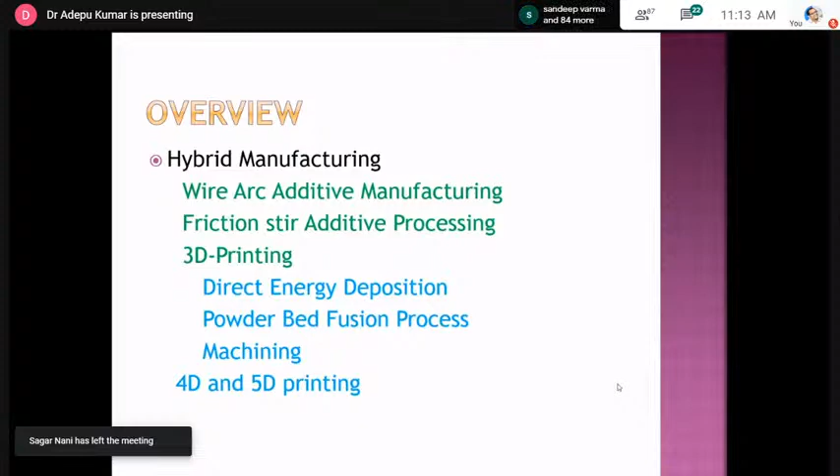I think most participants may be aware of friction stir welding, submerged arc welding, MIG welding and TIG welding etc. With the use of those techniques, we can add some extra additional features, and then develop a new product or new process that is useful for development of our products.

Basically, any manufacturing process comes under one of the areas - to develop any product, you can use any one technique or a combination of techniques to produce your components.

Suppose I want to develop a product of this nature, then I want to remove material from the stock, and finally I get the new product - that is known as the subtractive process. You remove material from the stock, then finally get the component useful for direct applications. Since you are removing material, it is a subtractive or negative process.

Coming to the next process, additive process - we are adding material layer by layer onto the substrate so that you can get the final component. You are adding something to the previous layer, that's why it is the additive process, or positive process.

The next process is the formative process. In this process also, you get the final component, but there is no addition or deletion of material from the stock. You only change the geometry from initial to final by pressing the material into a die so that you get the final shape.

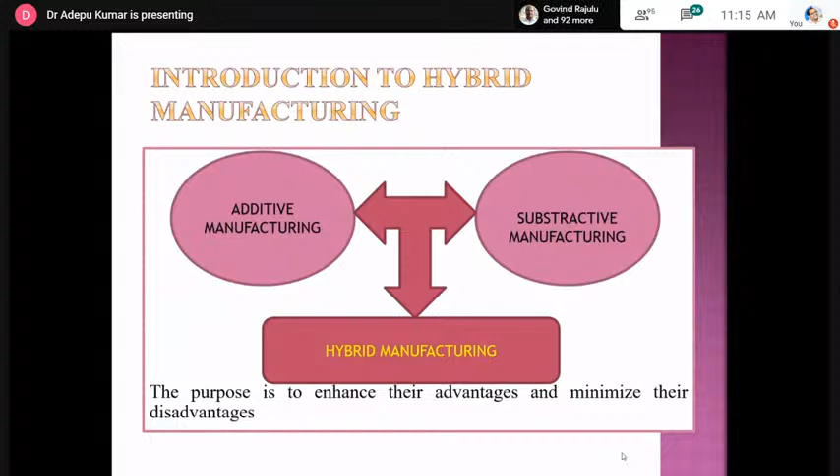For that, you need to develop a component through additive manufacturing with the same design. Then you need to remove the unwanted material from the geometry developed through additive manufacturing by machining process, and also do some finishing process. Then finally you get the final component.

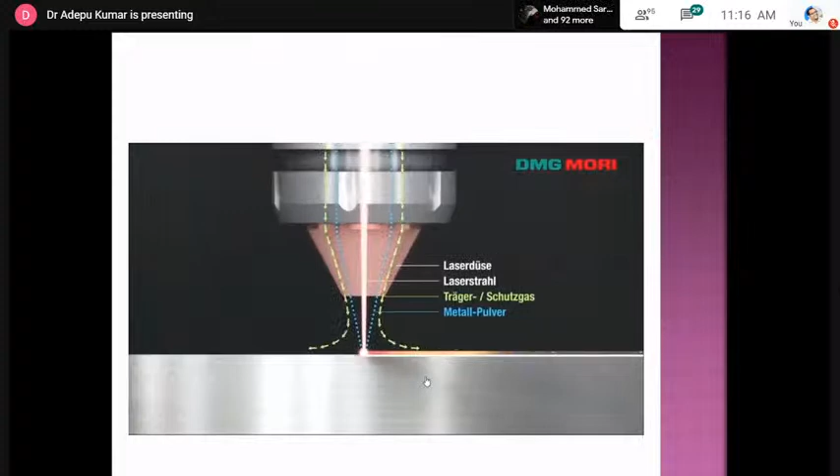So this is a small video - this is the direct energy deposition technique. In that you are developing the material by melting powder particles with a laser, and you can develop the component.

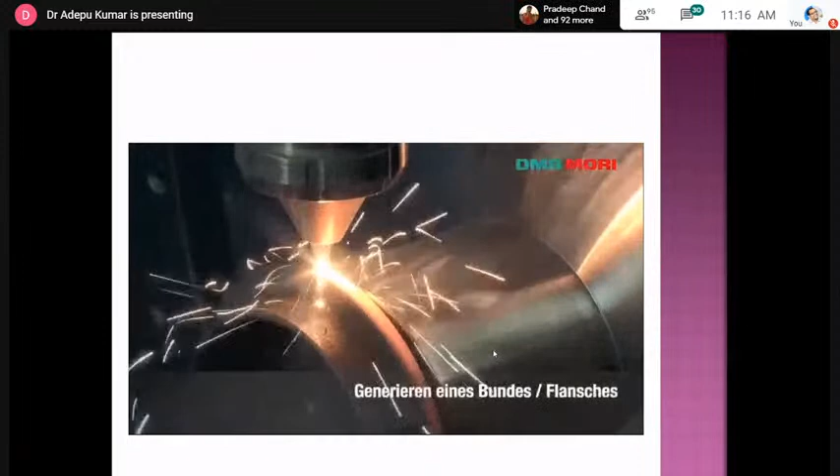Now this additive manufacturing is over, now you want to do machining. We can add a tool to the holder so that machining is performed on the component which is produced by the additive manufacturing process. Yeah, this is the final component.

So in that, my area is wire arc additive manufacturing process. There are some other techniques which can produce the same component through other technology like stereolithography, powder bed fusion process, direct energy deposition process - so many other 3D printing processes we are able to use to generate the product. But what is the advantage? You are going to see in future slides what is the advantage over other 3D printing manufacturing processes.

So the development of wire arc additive manufacturing is being driven by the need for increased manufacturing efficiency for engineering structures. It is able to produce a very near net shape preform without the need for complex tooling, molds or dies, offering potential for significant cost and lead time reduction, increased material efficiency, improved component performance, and reduction of inventory and logistics cost by local on-demand manufacturing.

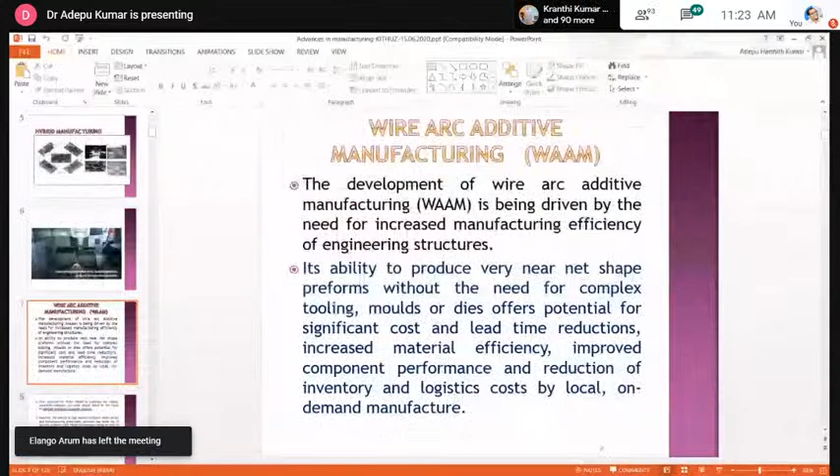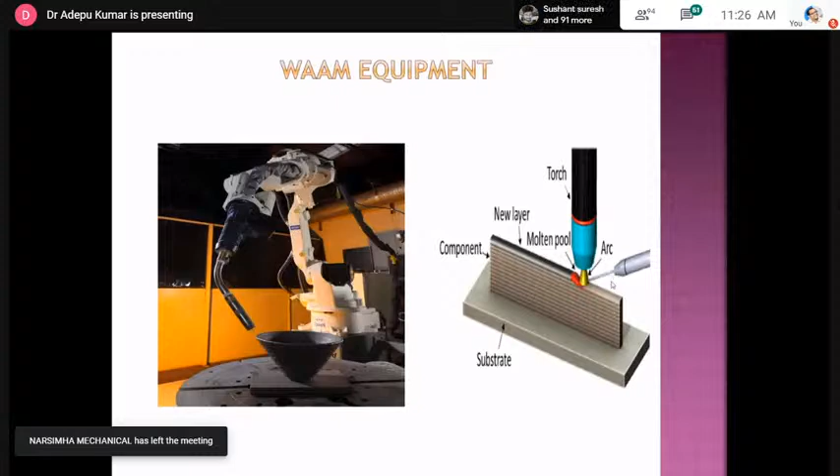So in between the layers, there is an interface. That interface is what we call a metallurgical bond between the two layers. If the metallurgical bond is perfect between the two layers, then whatever component you generate through wire arc additive manufacturing, or welding, or any other 3D printing process, your properties are good. Otherwise, your properties are not up to the mark.

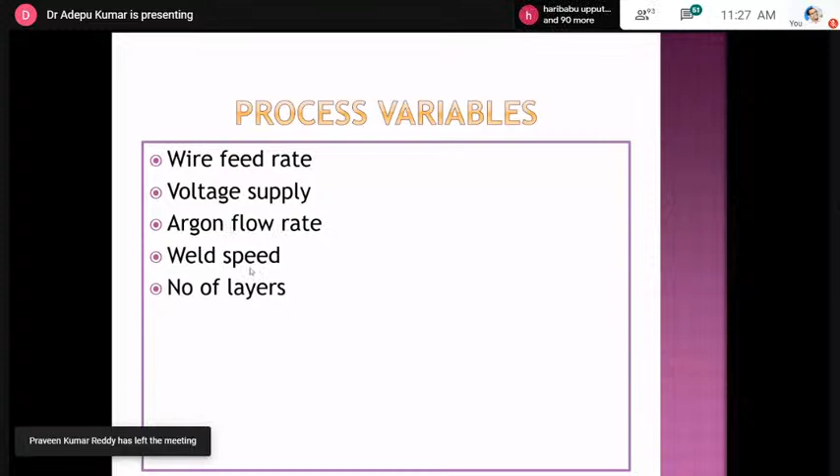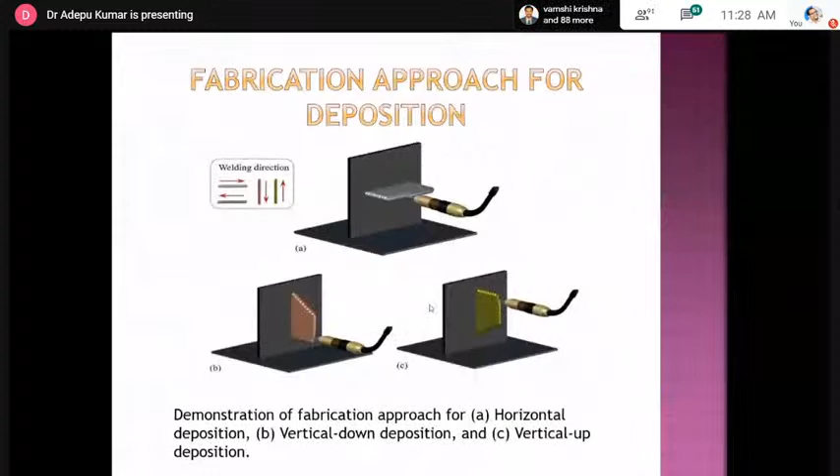So this is one video in wire arc additive manufacturing. This is one rib and another rib, that's where we started. So this is known as, yes, there are supporting structures. Now here the metal is deposited on the substrate with a certain velocity and certain speed, so that you can generate the 3D components very easily.

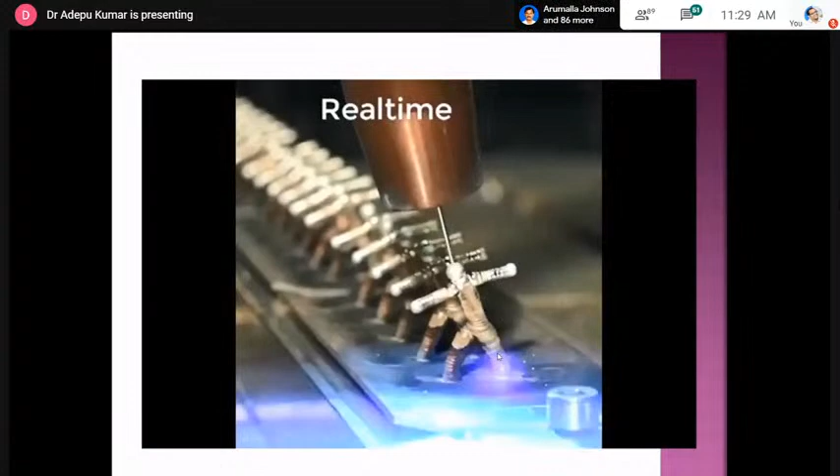So like that, you can develop the components through wire arc. So what are the benefits you are going to get? Production of large parts compared to powder bed fusion process, as the robotic arm volume is much higher than the normal 3D printing process. In that case, you can develop components in very large size and shape compared to 3D printing process.

Wire is less expensive compared to metal powders. WAAM hardware is less expensive compared to a 3D printer. It can deliver near net shape components, minimize the need for surface finishing, and is a good option for repair and maintenance operations for specific components like turbine blades, molds and dies.

So this is very important for repair applications. We cannot take out the entire component; you can do repair on-site for heavy structures. So the limitations of WAAM: heat management is somewhat difficult for materials like titanium using inert gas as atmosphere.

It limits the size of the parts that can be produced with this technology, and installing such a chamber will increase the cost of the equipment. Although a number of companies are developing WAAM technology for production, none is commercially available yet.

But as of today, we can combine KUKA and CMT process so that we can generate the system, and produce the component in the additive manufacturing area.

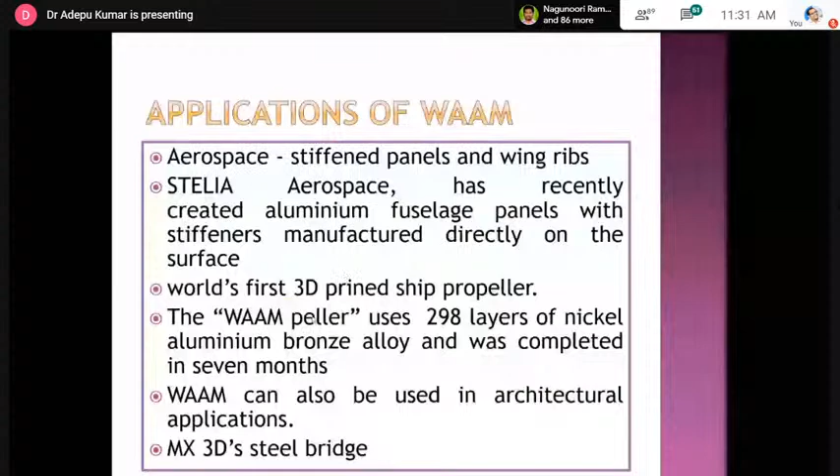Now another process is friction stir additive manufacturing. In the earlier process, we are melting the filler wire and depositing the melted filler wire onto the substrate, allowing it to solidify.

Some materials are not suitable for wire arc additive manufacturing, especially titanium and aluminum alloys - it is very difficult, requiring a lot of precautions. But in a solid state process, you generate components without much difficulty because you are not melting the material. You just heat it to its recrystallization temperature, which softens the material so you can develop the components.

It is basically originated from the friction stir welding process. In friction stir welding, a non-consumable tool has a shoulder and pin diameter, rotated at a certain RPM, with certain shoulder and pin features. The pin is inserted between the materials or layers to be processed, and the shoulder stays in contact with the topmost layer while rotating. This generates heat, which softens the material, and material movement takes place from the advancing side to the retreating side, completing the process.

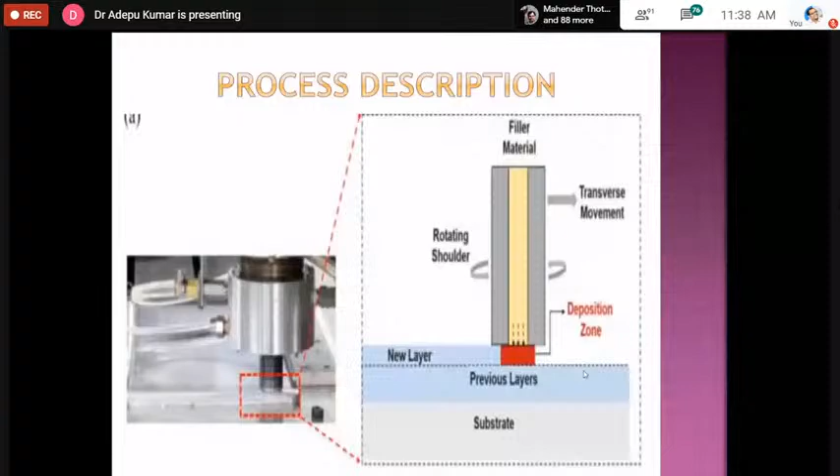So regarding friction stir welding and processing, let me explain with these two pictures. This is friction stir welding, and this is additive friction deposition. In friction stir welding, you have a shoulder and a pin.

This tool is rotated at a certain RPM. Because of the rotation, heat is generated between the rotating shoulder and the non-rotating base plate. That heat is utilized to soften the material. At that time, you give movement to the shoulder in terms of welding speed. Then the material is dragged from the advancing to the retreating side and fills the back side of the pin. That is the principle of friction stir welding.

So instead of a pin, I use a hollow shoulder. In the hollow shoulder, I fix the filler material which is going to deposit onto the substrate. Because of the heat generation by the shoulder and the substrate, that heat is utilized to soften this filler material and deposit it onto the substrate. So that's a simple change in the tool. Then according to deposition rate, you also give movement to the shoulder. That mechanism is required in friction stir additive manufacturing process.

This is a video I downloaded yesterday on friction stir additive manufacturing. You can also improve the efficiency 30 times the normal production times.

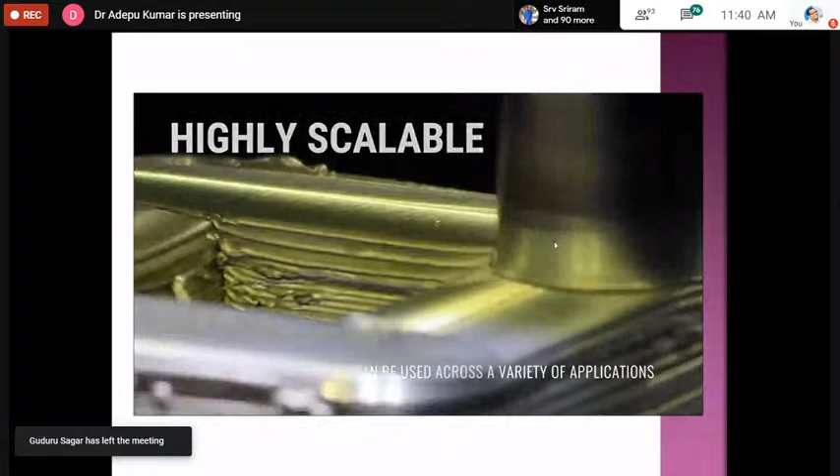So this is the hollow shoulder. In between there is material which is going to be deposited, that is the filler material. Then according to the deposition rate, you can feed that tool.

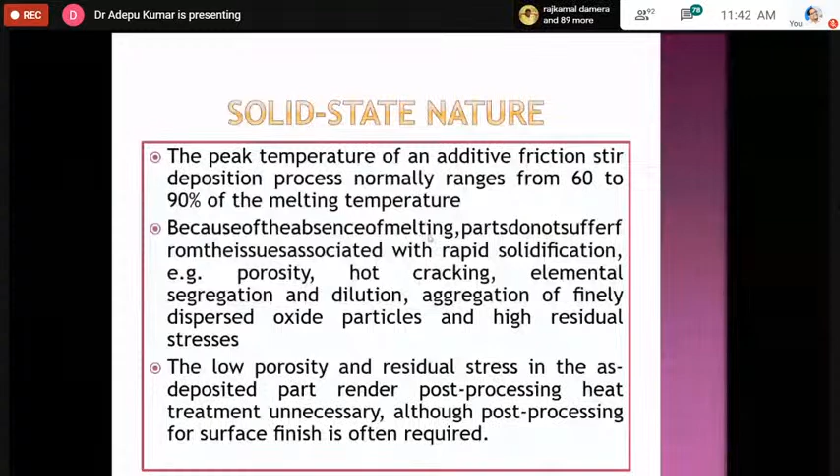Additive friction deposition can use a solid rod made from a cast or wrought alloy as the feed material. Traditional atomized powder feedstock can also be used without stringent requirements on powder attributes for high quality reproducibility. Aluminum 6061 and Inconel 625 parts have been manufactured using solid rod feed material, and aluminum molybdenum and aluminum silicon carbide composites have been manufactured from powder. There is no issue because it is a solid state welding process - you can weld or deposit any material.

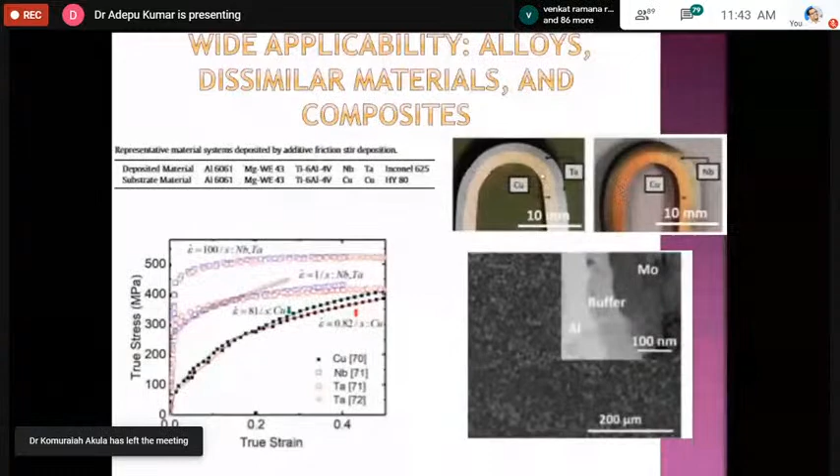What are the advantages and benefits of friction stir processing? It is non-beam and uses flexible feed material, is scalable, involves no melting, low energy, low cost, and flexible feed materials including cast alloys and consolidated powder. It has high build rate and large scale ability, repeatability, dynamic recrystallization, no stratification, refined grain size, equiaxed grain size, isotropic properties, and low porosity. Compared to 3D printing, you get a lot of advantages with friction stir processing.

The limitations: the development of additive friction stir deposition technology has focused on increasing part size and build rate. As a result, the shoulder and filler dimensions are large, leading to large in-plane features.

Next, in additive friction deposition, the deposition path is guided by a G-code based hatch pattern. Since algorithms are available to automatically convert the CAD file to G-code, it's straightforward to go from a CAD file. Nowadays CAD files are available in open literature - you can download the CAD file, and that file is converted into G-code. Then you can interface the friction stir welding machine according to the CAD file, and the tool moves accordingly.

Buckling is an issue in friction stir additive because you need to add a large amount of force during the processing, so buckling is a main issue for this process. Tooling is also an issue because there is a lot of wear and tear due to the friction generated, so you need to develop various tool materials for improving wear and tear.

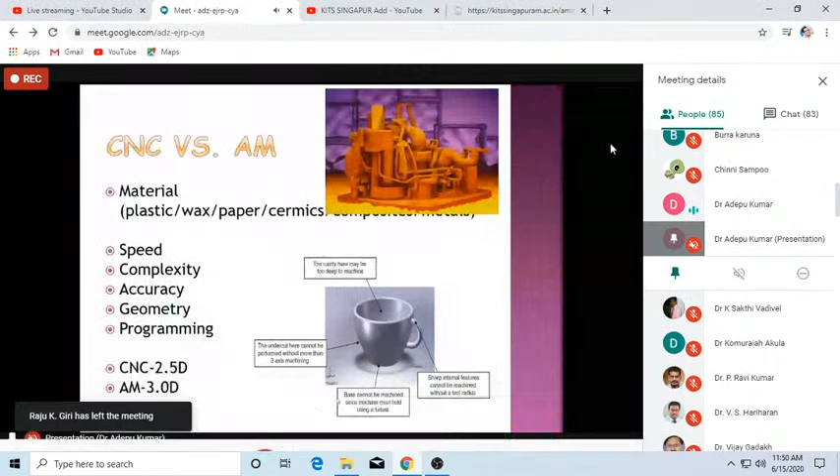Topology optimization can be used to get the final geometry. If your geometry is correct, you can convert that geometry into an STL file, but again you have to lose some features of the object. So if you don't want to lose the features, you need to apply topology optimization techniques, so that you can generate the components without losing those features.

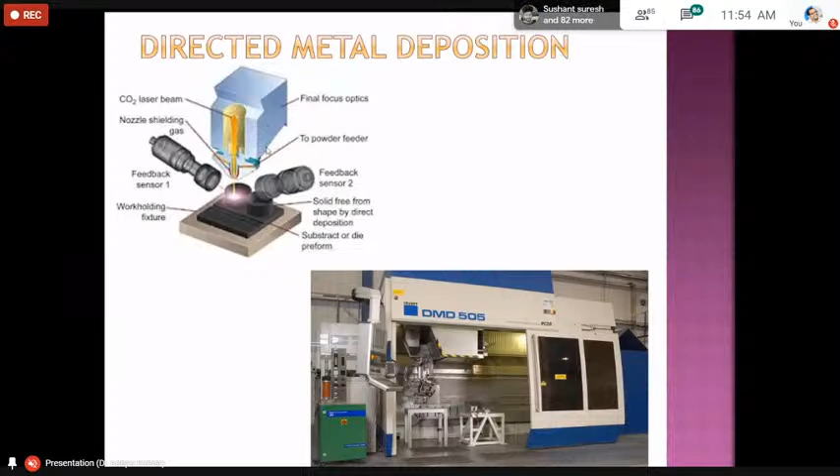We are coming to direct energy deposition, where the laser is a power source interacting with the powder particles. The powder particle is melted and fused onto the substrate. If the laser is not sufficient, there is a feedback sensor that senses the laser power. If it is not melted, it gives a signal to the laser source, which then increases power so that you can build the components.

So direct energy deposition technology, DED, DMD, direct metal deposition technology, is generally used for repair of structures. The benefits include speed, as in faster product to market.

A study performed at the National Center of Manufacturing Science indicates the die production time can be reduced by 40% using DMD technology. Economically, there are lower tooling costs due to factors including reduction.

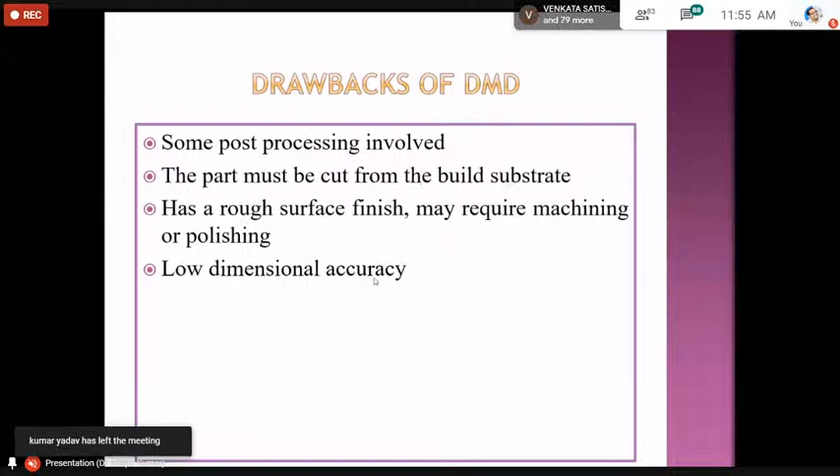Then drawbacks: post-processing is involved, the part must be cut from the build substrate, it has a rough surface finish and low dimensional accuracy. Applications include die repair and refurbishment, direct metal prototyping, surface modification, and aerospace and aircraft components.

Then another process, powder bed fusion. Here the powder is spread onto the substrate, then you apply the laser power source according to the STL file format. The laser source moves according to the STL format, the laser power interacts with the powder, the powder is melted and deposited on the substrate, so that you can finally generate the components.

Through the additive manufacturing process, DED and PBF, that is powder bed fusion process, a lot of material is wasted in this process compared to DED technology.

Now this is another important mechanism involved in either powder bed fusion or DED process. So here is the substrate, and the laser power source is impacting on the substrate. Then some of the laser is reflected back, some is scattered, and some is absorbed by the material, and some is transmitted.

Whatever laser is impacting onto the substrate, if it has high absorptivity, more and more of the energy supplied to the substrate material will be totally absorbed by the material, and melting takes place.

Then some materials have low absorbability, like aluminum alloys. Those are highly reflective in nature, so whatever laser is impinging onto the surface will be reflected back. The absorption of laser by the material is very less, so the heat content is not sufficient, and due to that, melting of the material could not take place.

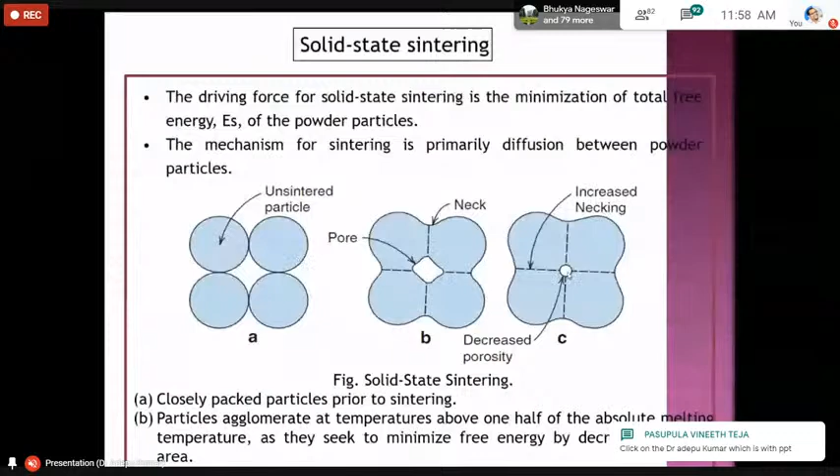Another mechanism is chemically induced binding. Because of the presence of SiC and the presence of oxygen, it forms SiO2, which binds together a composite of SiC and SiO2, acting as a binder. Similarly, due to chemical reaction with oxygen to form oxides like zirconium oxide, or aluminum in the presence of nitrogen forming aluminum nitride, the particles bind together.

Then another mechanism involves binding material which is coated or added to the powder particles. Because laser energy is available, that energy is utilized to melt the binder particles, which will be occupied between the grains so that the bond is formed.

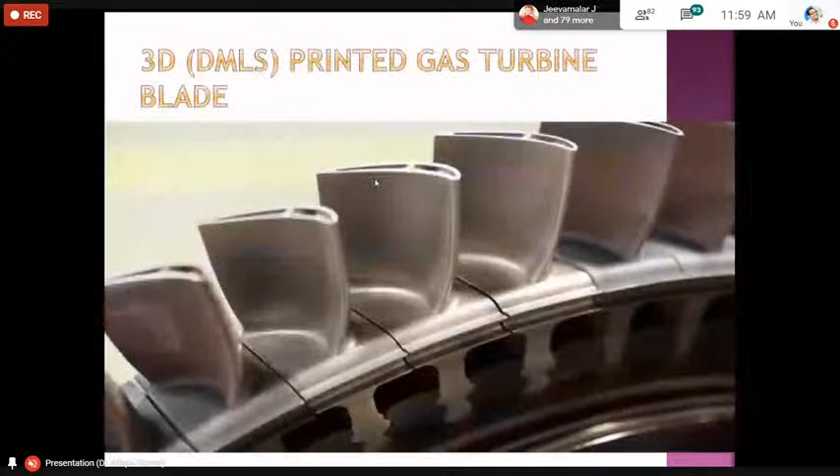Then full melting is the normal mechanism: melting of all the powder particles and allowing them to solidify to form the part. So this is one of the mechanisms in powder bed fusion, with drawbacks and applications in medical, aerospace, manufacturing, automotive, and electron beam as another source.

This is similar to the powder bed fusion process using a laser power source, but here instead of laser, electron beam is the source. Because of the electron nature of the electron beam, it should be performed under vacuum environment only. Without vacuum, you cannot perform 3D printing using electron beam as a source, because electrons are very, very small and very low density compared to oxygen and nitrogen molecules. That's why you don't get accurate penetration and cannot generate heat at a particular place. That's why we need to create a vacuum.

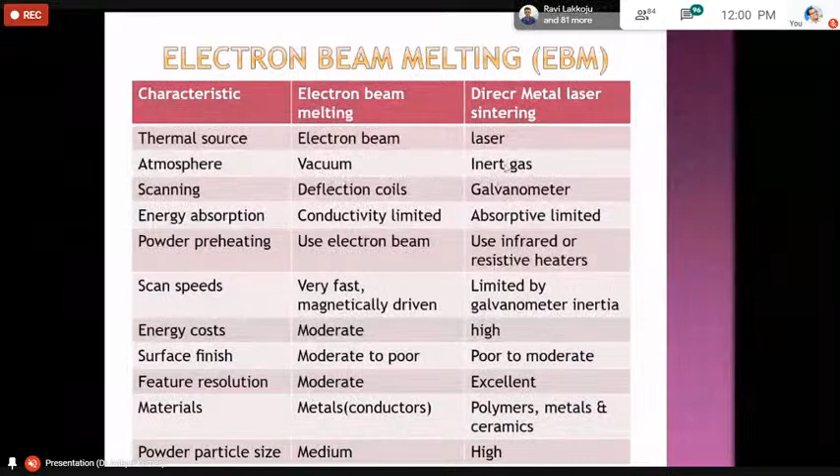But due to the creation of vacuum, the cost of the process is very high compared to laser as a power source, and the size is also very limited. So the difference between electron beam and laser beam is that electron beam must be performed under vacuum, whereas laser can be performed in inert gas, and mostly works with conductive, highly absorptive materials.

What are the benefits? Productivity is increasing, and there are no residual internal stresses. The drawback is that it only works with conductive materials.

Then what is 4D printing? 4D printing is the process through which a 3D printed object transforms itself into another structure under the influence of external energy input, such as temperature, light, or other environments.

This is similar to the 3D printing process. After printing, just because of the influence of an external agency, the object's dimensions are going to change in the 4th dimension - that is known as 4D printing. There is no confusion at all; we are printing the material with a smart material.

Or functionally graded material - according to the function, it is going to change the material property dimensions. So however, 4D printing adds the dimension of transformation over time. It is therefore a type of programmable matter.

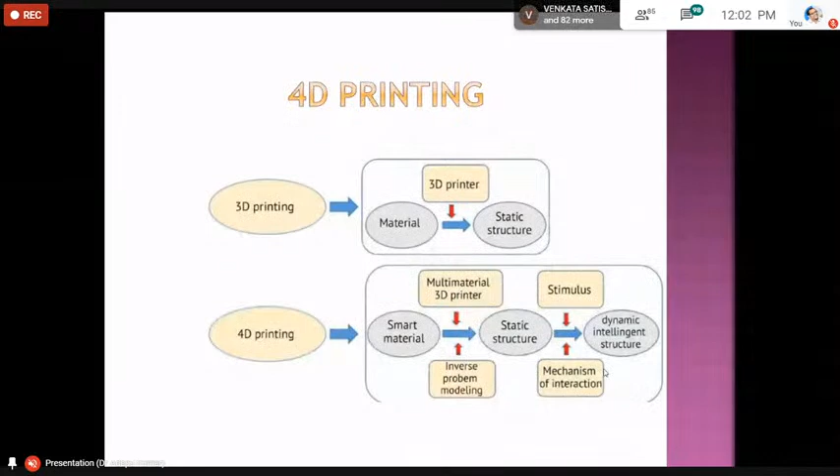Just a comparison between 3D printing and 4D printing: in 3D printing of material, you get a static structure. Here in 4D printing, you get dynamic structures because of the influence of the external agency - those dimensions are going to change, that is what you can call 4D printing. The size changing, I'm just showing one video.

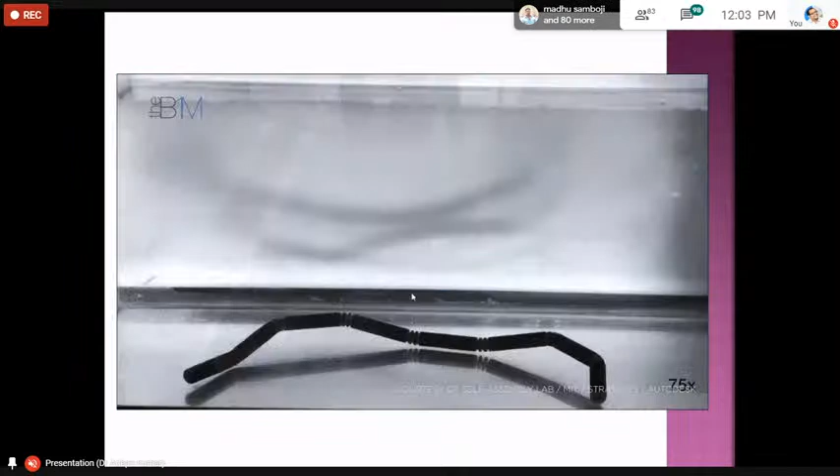So initially we printed 3D printed material, then because of the external agency, this is going to change.

Now coming to 5D printing, the name of this technology is quite misleading, since 5D printing does not refer to the addition of a fifth dimension of printing. It is not going to add any fifth dimension. 5D printing refers to 3D printing using a 5-axis 3D printer instead of the 3-axis used in conventional 3D printing. 5-axis additive manufacturing essentially builds the object from multiple directions, thus producing stronger parts than regular 3D printing.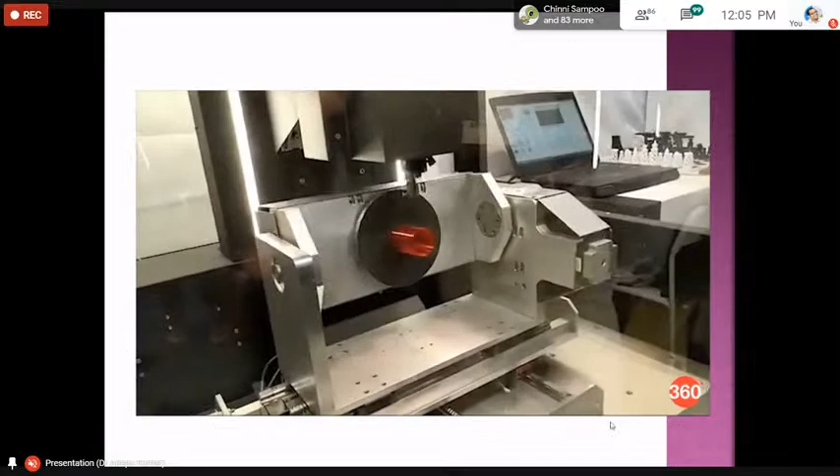So some of the research directions you can also see from this.

New product development and innovation of components through additive manufacturing, through wire arc additive manufacturing or hybrid machining process, and biomedical applications. New materials developed through friction stir additive manufacturing or 3D printing, and rapid tooling and rapid manufacturing. Also, geometric modeling, data exchange and software issues, process improvements and development of new process equipment and controls, development of newer applications in aerospace, electronic process modeling and simulation issues.

Then there's the scaling issue, from micro to nano level. With this, I can conclude my lecture. This is now open for discussion.

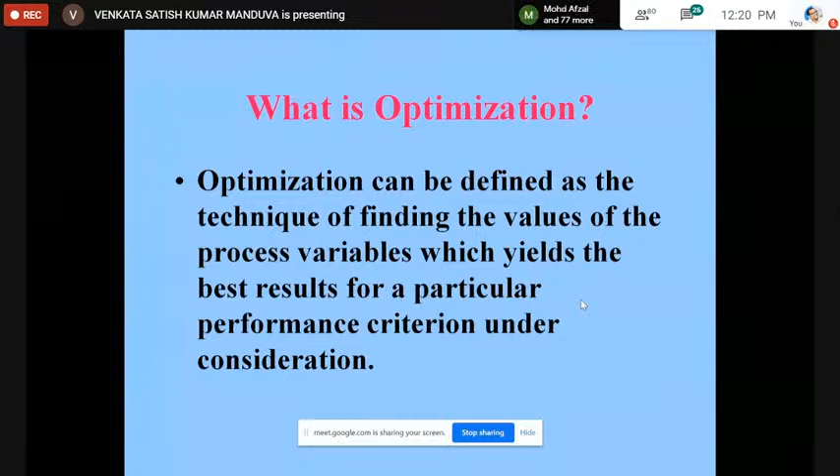Coming to today's topic, because the algorithms we are talking about are meant for optimization, let us see what is optimization. As all of you know, optimization can be defined as the technique of finding the values of the process variables which yield the best results for a particular performance criterion under consideration. So the performance criterion we are deciding, and also the values of the process variables. Of course, this is everywhere in our day-to-day life, not only in industries, not only in research. Knowingly or unknowingly, we are solving these optimization problems.

For example, we go to the college or institute from home, or come back home - automatically we try for the shortest path. Similarly, if you want to do some personal work, we prioritize and optimize the time so that all the works prioritized according to priority are completed in time. Similarly, budgeting at home or at any institution or organization. These are simple examples which I want to share for optimization in our day-to-day life.

Similarly, this is a mathematical problem everybody knows - the traveling salesman problem. A person starts from a city and has n number of cities to cover, and has to come back to the original city - what is the shortest path, and in how much time can he cover it. That is the problem, a well-known mathematical problem. If you take 20 cities, a person has to cover all 20 and come back to the original city - there are 20 factorial possible ways. You have to search all those ways for the best one. Such problems are really tough to solve by normal optimization techniques, so we may use advanced methods, tools, or algorithms for solving such problems.

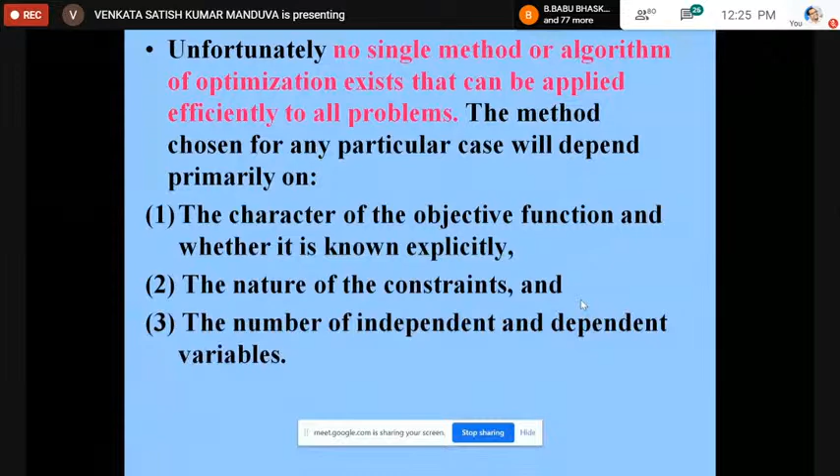So constraints are a set of conditions that allow unknowns to take on certain values but exclude others. For example, in a scheduling problem, precedence constraint is one example. What is precedence constraint? That means unless the preceding operation is completed, we cannot go for the succeeding operation. That is, unless drilling operation is completed, we cannot go for boring or reaming.

So when we are scheduling, we have to keep precedence constraints in mind. Similarly, for other problems, different types of constraints will be there. And almost all problems will have an objective function, either maximization or minimization. But there are rare possibilities with no objective function.

In reality, in some cases, for example design of integrated circuit layouts, the goal is to find a set of variables that satisfy the constraints of the model. Here the user does not particularly want to optimize anything. Whether constraints are satisfied or not is our intention, but we are not interested in maximizing or minimizing anything.

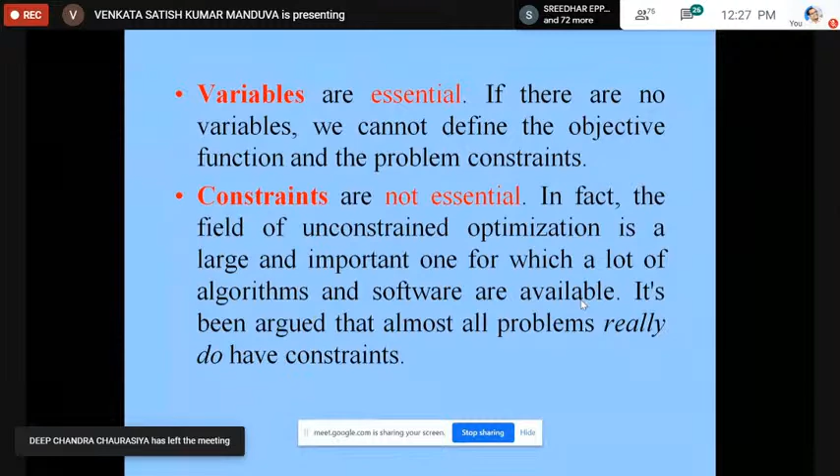And models: modeling is the process of identifying the objective function, variables, and constraints. The goal of a model is to get insight into the problem. So if we want to get insight into the problem, we need to model it. A good mathematical model of the problem is needed for effective optimization.

And algorithms: even though models are available, most models for real world problems are too complicated to solve with paper and pen. So an effective and reliable numerical algorithm is needed to solve such problems. Modeling is there, but it has its own limitations, and that is how the necessity of algorithms comes into the picture.

So there is no universal optimization algorithm, as I told you earlier. Even though a variety of optimization algorithms are available in literature, we cannot say there is one algorithm which can solve any type of optimization problem. But whatever optimization algorithm it may be, we will expect certain characteristics from it.

What are those characteristics? What we expect is robustness, that is good performance for a wide class of problems. It may not be better, it may not be the best for any particular problem, but at least for a wide class of problems it should give good performance.

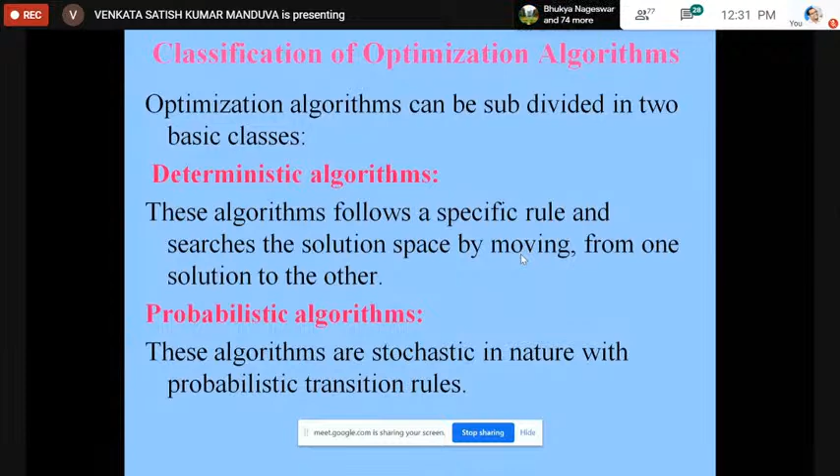What are the examples for different algorithms? In deterministic algorithms, we have covered a few, and there may be more under this category which are missing here. Just to give you an idea of the difference between deterministic and probabilistic, I have shown this slide. State space search, branch and bound, algebraic geometry - these come under deterministic algorithms.

Whereas under probabilistic, a lot of algorithms are available in this category, like hill climbing, random optimization, simulated annealing, tabu search, and so on. Similarly, you can see the classification here.

We are concentrating today on soft computing - the area under which evolutionary algorithms and swarm intelligence come. So today we are not concentrating on other algorithms, even though there are a variety like Monte Carlo algorithm or others. Under soft computing, evolutionary computation is there, so evolutionary algorithms indirectly come under evolutionary computation.

There are a variety of evolutionary computation algorithms like genetic algorithms, learning classifier systems, evolutionary programming, evolution strategies, and of course genetic programming. Sometimes in the literature, a few people say differential evolution is a separate one which comes under evolutionary algorithms.

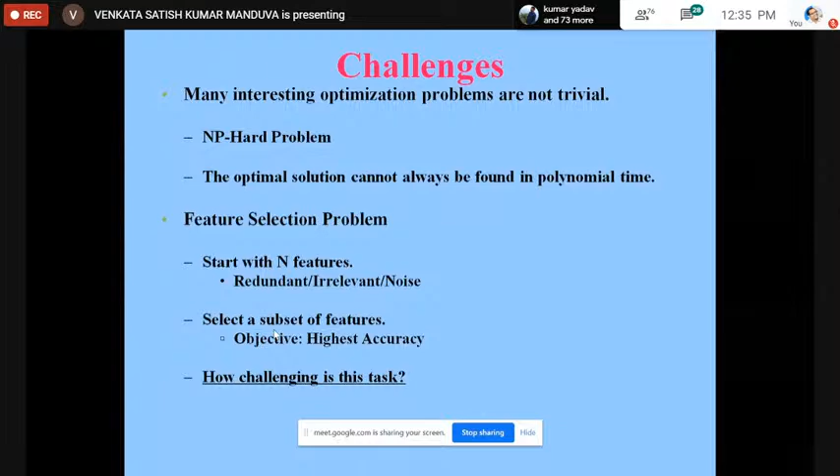So this is one point where we think about other alternative algorithms. Similarly, there are challenges - most optimization problems are not trivial and are NP hard. Feature selection is another problem in most optimization problems. If you have a 32 feature problem, there are so many possible combinations, so searching for one particular best solution is a tough task.

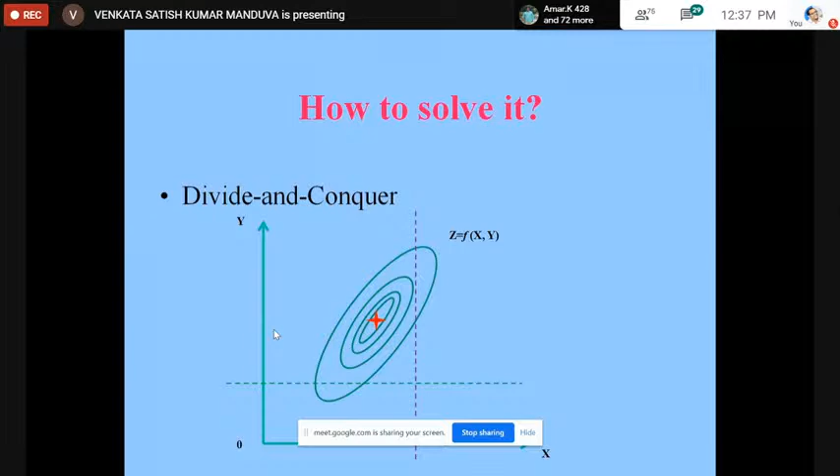So there are some certain issues with traditional algorithms. How to solve this? The way the literature has given us is that we can divide and conquer. That means the solution search space can be divided and conquered, meaning you divide the search space and then search the space in parallel. That is the best method people have found.

So the solution for this is parallel search, conducting searching in different areas simultaneously. Rather than moving one by one, you will go simultaneously at different places and search. That is parallel searching, and it is also population based, meaning at a time we will take a group of solutions. In parallel search, we will try to avoid unfortunate starting positions and also employ heuristic methods to effectively explore the space.

Exploitation is one important factor, exploration is another important factor. Exploration is covering the total search space for optimal solutions, whereas exploring at one space, you don't want to leave any stone unturned. That is exploitation. So with this concept, the evolutionary algorithms came into picture.

So now let us see what evolutionary algorithms are. It is nothing but learning from nature, as I told you. You can see how we are now flying by planes, because humankind got motivated by looking at the birds, and that is how today we are flying by aeroplanes or even rockets. The idea of flying came from nature only. Human beings imitated nature. This is one simple example.

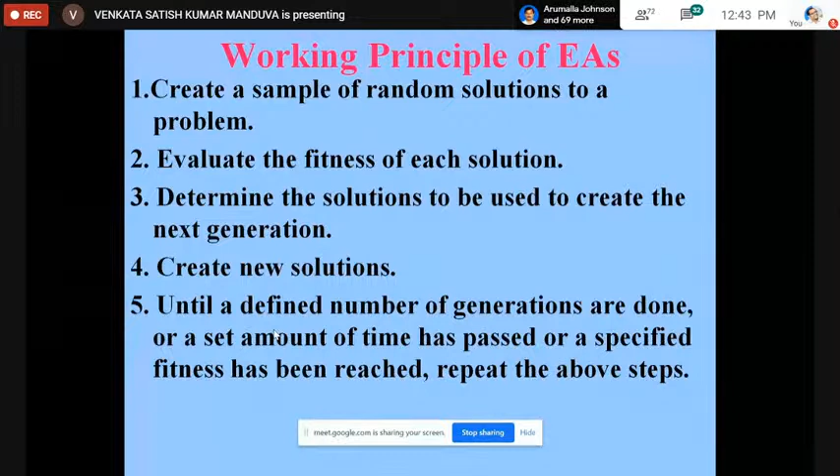So what do we need to solve an optimization problem through EA? We need a proper representation of the potential solution, which is very important. Similarly, a correct way to create an initial population of potential solutions must be done correctly. Also, an evaluation function should be there, to calculate the fitness of the individual, as I told you just now. These are important, and the selection procedure must be chosen properly.

Unless you choose the parents properly, you cannot expect better children. If better parents are chosen, you can expect better or even the best children normally. Sometimes, irrespective of the parents, there is still a possibility of good outcomes, but since we have the choice in our hand, we will try to choose the best parents.

Similarly, evolutionary operators like crossover and mutation alter the composition of the children. And parameters like population size, number of generations, probability of crossover and mutation are to be selected appropriately.

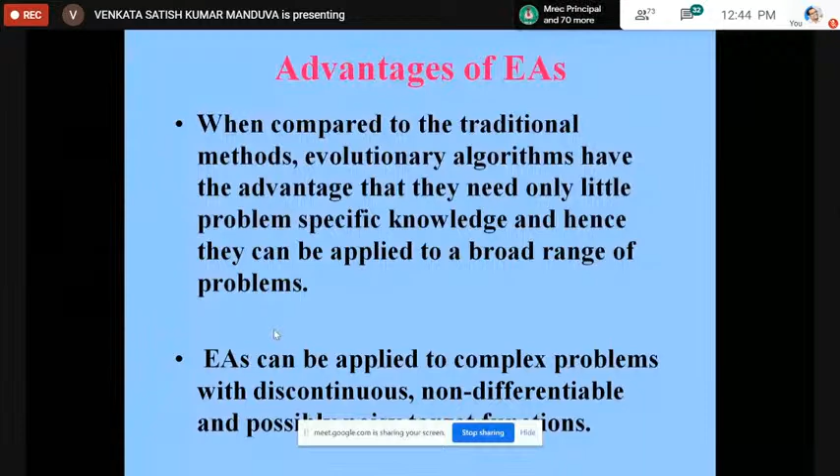Now, advantages of EA. Compared to traditional methods, evolutionary algorithms have the advantage that they need only little problem-specific knowledge, and hence can be applied to a broad range of problems. EAs can be applied to complex problems with discontinuous, non-differentiable, and other such characteristics. Their response to external process parameters is robust compared to previous methods, and hence does not need fine-tuning of these operators even when applying them to different problems.

Evolutionary algorithms use probabilistic transition rules, as I told earlier, not deterministic, because they come under probabilistic algorithms. They are generally more straightforward to apply because no restrictions exist for the definition of the objective function. And as a variety of evolutionary algorithms are available, a problem-specific EA can be chosen by the end user.

Evolutionary algorithms can provide a number of potential solutions to a given problem, and the final choice is left to the user. It can give a number of better solutions, and you can choose one among them. This is especially possible in multi-objective problems, where you will get Pareto optimal solutions, and you can choose one among them.

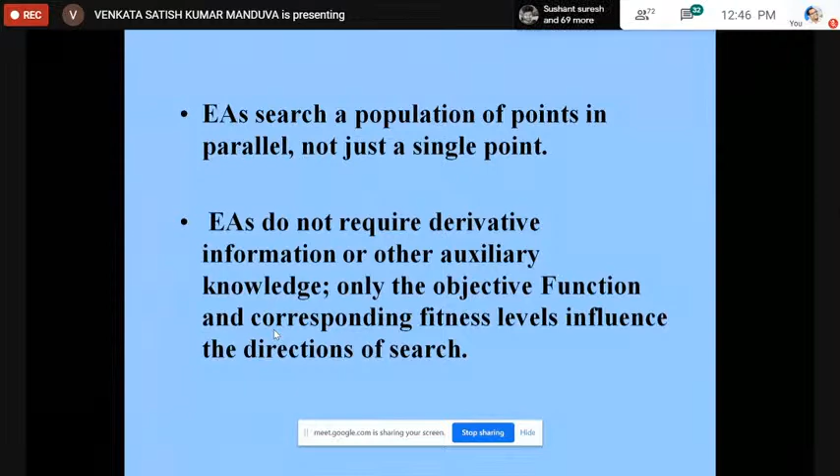So evolutionary algorithms search a population of points in parallel, not just a single point at a time. And they do not require derivative information or other auxiliary knowledge; only the objective function and corresponding fitness levels influence the direction of search.

Coming to genetic algorithms, they are good at mapping the natural process of evolution onto a computer system. As I mentioned, it purely imitates nature, where parents are used to produce children. Binary coding is normally used.

I will come across GA in detail, but I want to give a few points about evolution strategies also, which also come under evolutionary algorithms. Evolutionary strategies differ from GA mainly in the selection process. In GA, the next generation is created from the parental population, choosing individuals depending on their fitness.

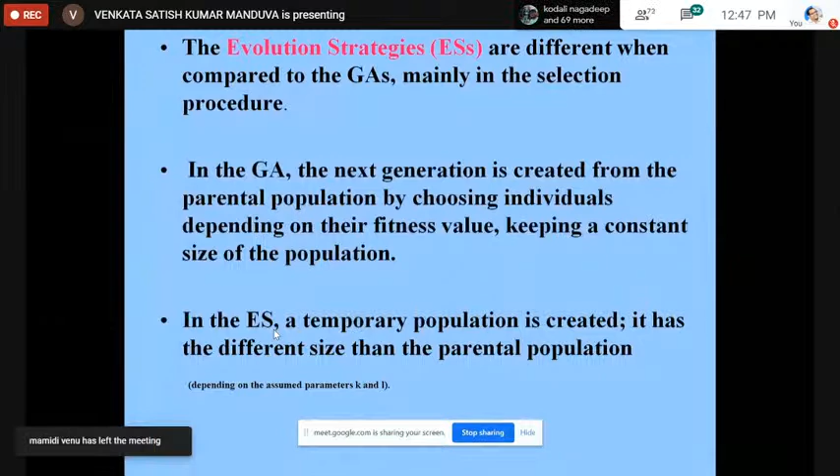Whereas in ES, a temporary population is created, which has a different size than the parental population. This is where the two differ. In this step, fitness values are not important. Individuals in the temporary population undergo crossover and mutation, whereas in genetic algorithms, it is not the case.

From such populations, an assumed number of best individuals are selected for the next generation. That is how ES proceeds. ES operates on vectors of floating point numbers, whereas classical GA operates on binary vectors.

Coming to genetic programming, another member of evolutionary algorithms which is relatively new, it is a specialized form of GA which operates on a very specific type of solution using modified genetic operators. It was developed by Koza as an attempt to find a way for automatic generation of program code when the evaluation criteria for proper operation is known.

Of course, genetic operators are specialized, working on trees. This is the basic difference. In genetic programming we use trees, with crossover as exchanging subtrees and mutation as change of a node or leaf. Because the search solution is a program, the evolved potential solutions are coded in the form of trees instead of linear chromosomes. So GP differs from GA in the coding schema used, but the loop is the same, only here we use trees.

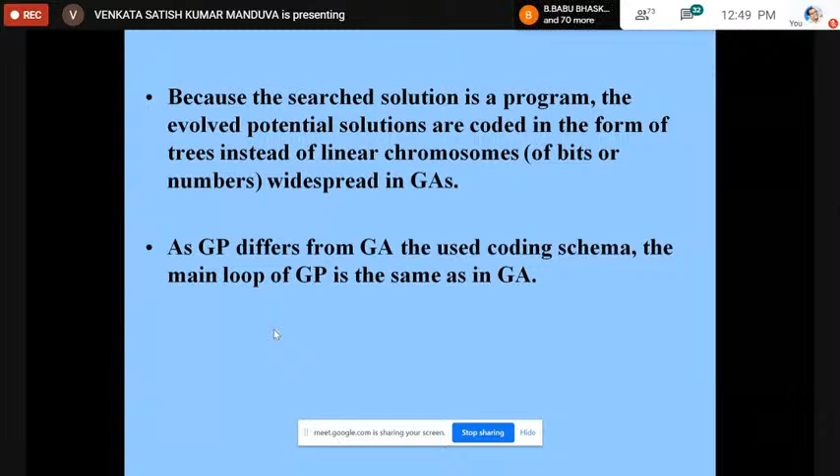Coming to evolutionary programming, it was developed as a tool for discovering the grammar of an unknown language. However, it became more popular when proposed as a numerical optimization technique. EP is also similar to ES, evolutionary strategies, but with one essential difference: in evolutionary programming, the new population of individuals is created by mutating every individual from the parental solution. As discussed, in ES it was not like that.

A temporary population was created, and in ES, every individual has the same probability of being selected to the temporary population, but that is not so in evolutionary programming. Here, mutation is based on random perturbation of the values of particular genes, and the newly created and parental populations are the same size. Finally, a new generation of the population is created using ranking selection. Of course, different types of selection operators exist; this is just one type.

Coming to differential evolution, the last member of the evolutionary algorithms we will discuss in detail. It is a type of evolutionary algorithm useful mainly for function optimization in continuous search spaces. The principal version of DE was developed by Storn and Price, but later different versions were developed by others.

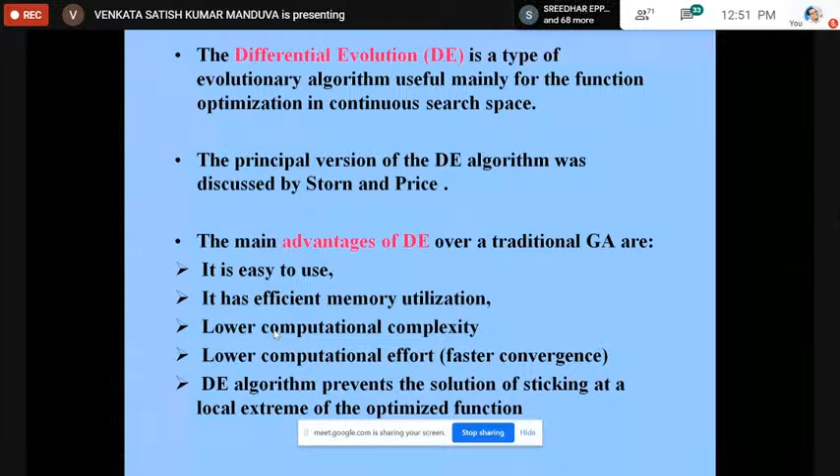Let us shed some more light on genetic algorithms. As I told you in the beginning, my focus is to give information to the youngsters so that they can pursue further and use these wonderful tools for their respective areas.

Coming to genetic algorithms, they are random evolutionary search algorithms which mimic the principles of natural genetics. It was developed long back in 1975 by John Holland, and it is a set of procedures which, when repeated, enable solutions to a specific problem.

Before looking at the steps, let us see some terms involved in genetic algorithms. Objective, irrespective of the algorithm, is the function to be considered for minimization or maximization. It need not be only for GA; for any algorithm, it will be there.

Coming to gene, this is a single feature within a chromosome, or a working subunit of DNA, because we will talk about genes in terms of genetics—that is how genetic algorithms are named. Similarly, gene trait: color of eyes is a trait, color of hair is a trait, and so on.

Allele is another possibility—color of eyes need not be only gray, it can be blue or black. Similarly, genotype is the actual genes carried by an individual, whereas phenotype is the physical characteristics into which genes are translated. This is just some awareness about the terminology I'm trying to give.

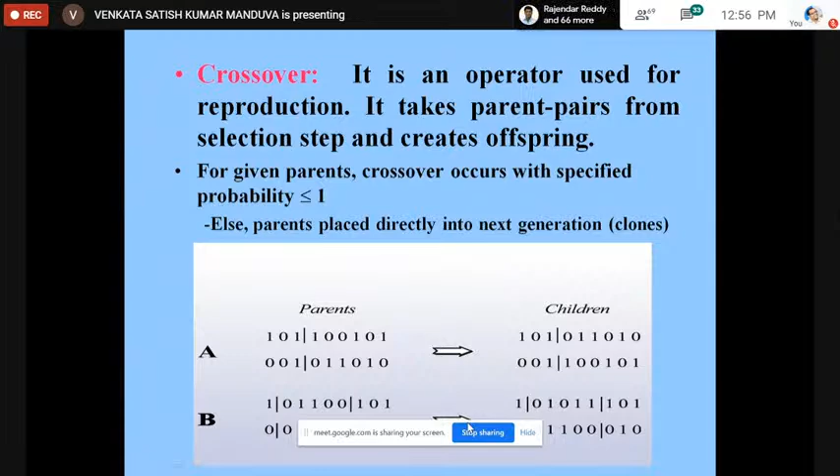Then mutation—mutation is another operator. It is an operator which exchanges one gene with another gene within the chromosome, and it slightly varies; you can see one is replaced with 0.

I want to outline the steps involved: initialization, random selection, evaluation of fitness. Once the initial population is generated, its fitness is evaluated, then parents are selected, then reproduction—that is, crossover and mutation—is done. These are the normal steps involved.

I also want to show the same process in flowchart form—this is how it takes place.

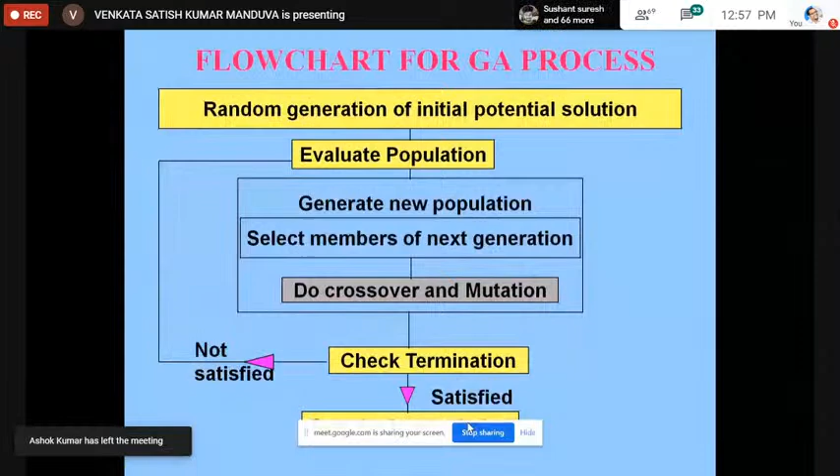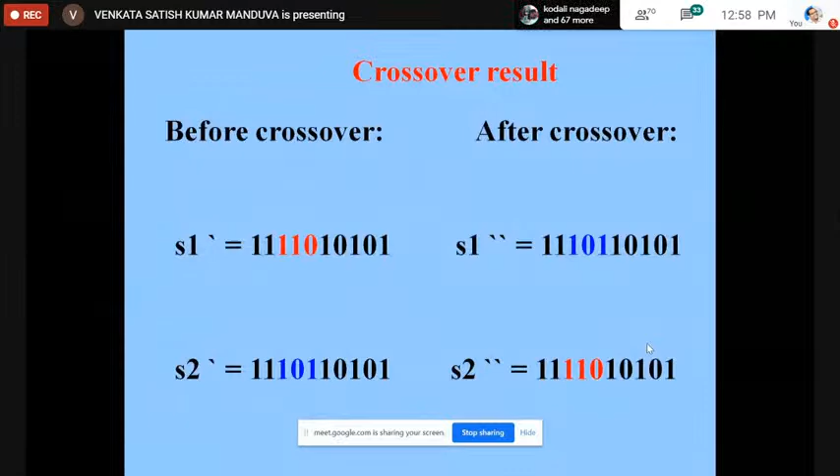So now we have done crossover. You can see this crossover on the same generation's population—we selected two parents, S1 and S2, and performed crossover. We also performed mutation. If you observe, the fitness has changed slightly.

Of course, it is only one generation. Like that, we can go on generation to generation. We can increase the fitness, and also we can get a better solution.

Coming to differential evolution, the second member in evolutionary algorithms. It is also a population-based algorithm, and it is an improved version of genetic algorithms, I can say. Here vectors are used, NP vectors, each of dimension d, where d is the number of variables in the optimization problem. It is also randomly searching the space. So here, I want to introduce the main concept of DE.

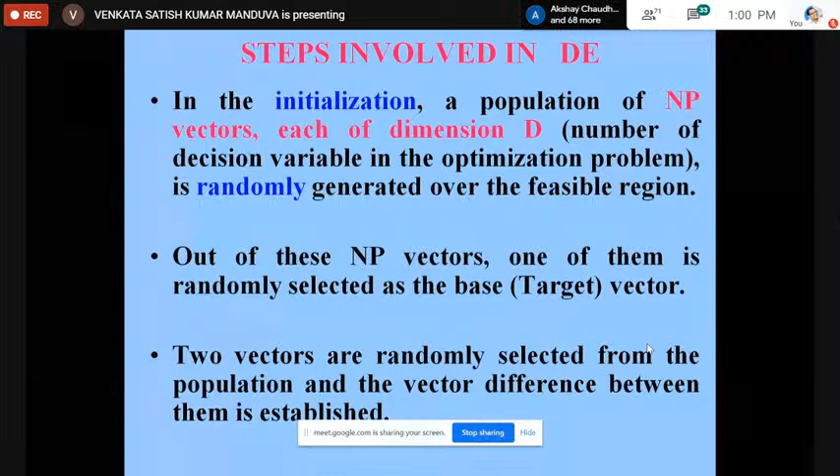Basically, two vectors are randomly chosen from the population. Suppose different vectors are available, each vector is nothing but a solution. Two vectors are randomly selected from the population, and their vector difference will be calculated. This is shown as XR2G minus XR3G - that is the difference. This difference is multiplied by a weighing factor F. Once F is fixed at the beginning of the algorithm, it will normally be maintained throughout the algorithm.

Once the mutant vector is known, then a target vector is also selected from the population, and the target vector and mutant vector are now subjected to crossover. For all dimensions in the vector, we will do this crossover operation, and then based on that, we will generate a random number. We have the crossover probability already fixed. Based on whether this random number is less than or equal to CR or not, we will choose either the mutant vector or the target vector. If satisfied, we choose the mutant vector; otherwise, the target vector. So crossover operation is performed in differential evolution.

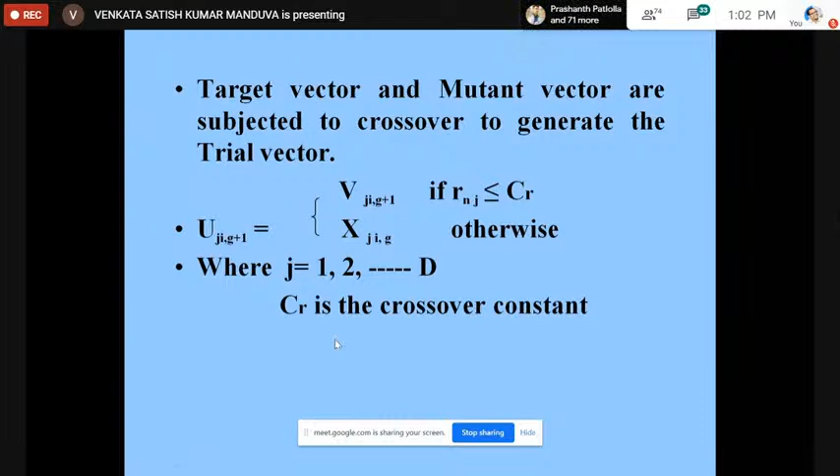So if the trial vector and target vector are compared - first we got the mutant vector, then we got the trial vector after crossover, and now the target vector is with us. We will compare the trial vector and target vector, and whichever is fittest, we take for the next generation. These trial and target vectors are compared to decide the member for the next generation.

So this is how the process continues: random generation of initial population, then evaluation of population, new population - very similar to the previous genetic algorithms method. But here, mutation is very, very important in case of differential evolution, whereas crossover is more important in genetic algorithms.

So you can see a small example here. There is a problem with 6 individuals, and the number of dimensions is 5. This is the target vector I have chosen, and these two are randomly chosen - R2 and R3, XR2 and XR3. The difference of these two, here it is 0.80, is multiplied by F, which is 0.8 in the table. If you calculate the difference and multiply it, you get F into the difference, F into XR2 minus XR3, and then you get the mutant vector.

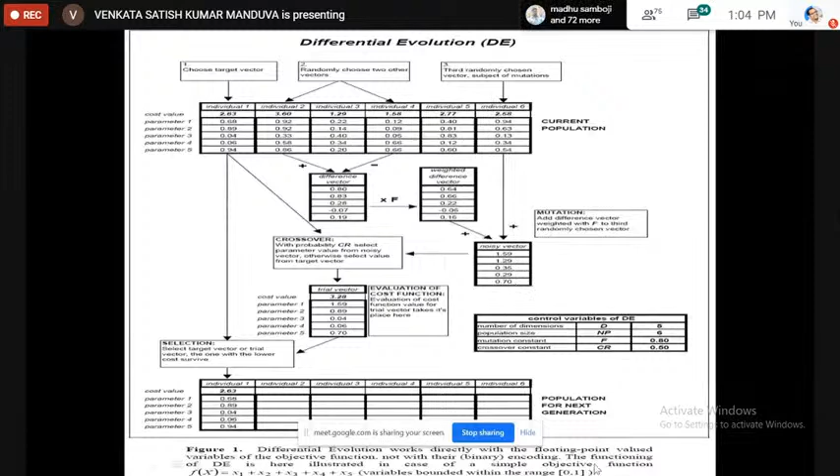Similarly, comparing GA and DE, of course DE has many advantages over GA. It is mainly crossover in case of GA, but mutation in case of DE, as I told you. In genetic algorithms, all parents are replaced by their offspring irrespective of their fitness at the end of every generation. So there's a possibility of a good parent string being replaced by its deteriorated child in case of GA. But in case of DE, this possibility is eliminated because every child has to compete with parents to get its place in the next generation.

The people who developed this gave one basic strategy, but later other strategies were also developed. This basic strategy is generally denoted DE/X/Y/Z, where DE stands for differential evolution.

X represents either a randomly chosen vector or the best vector - the next slide will give more clarity. Y is the number of differences - whether we are taking the difference of one set of vectors or two sets of vectors. Z stands for the crossover type, whether it is exponential or not. Similarly, D is the number of dimensions in the problem.

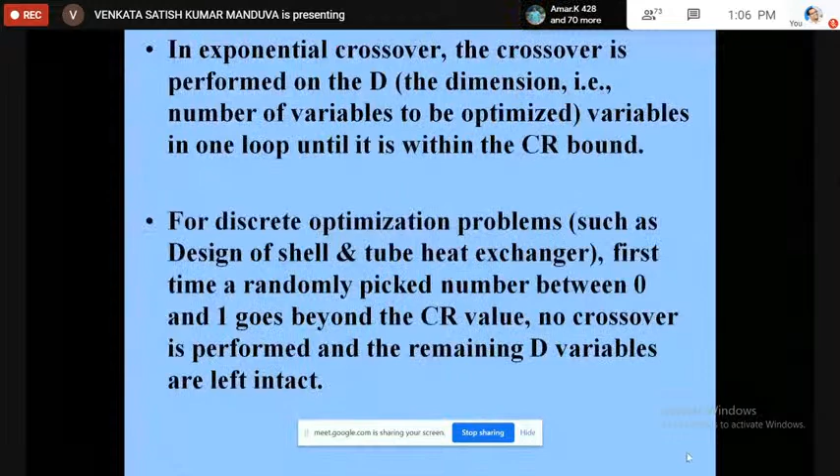Other important parameters are the CR value - we have to be very careful in selecting it. These are the different strategies I told you about.

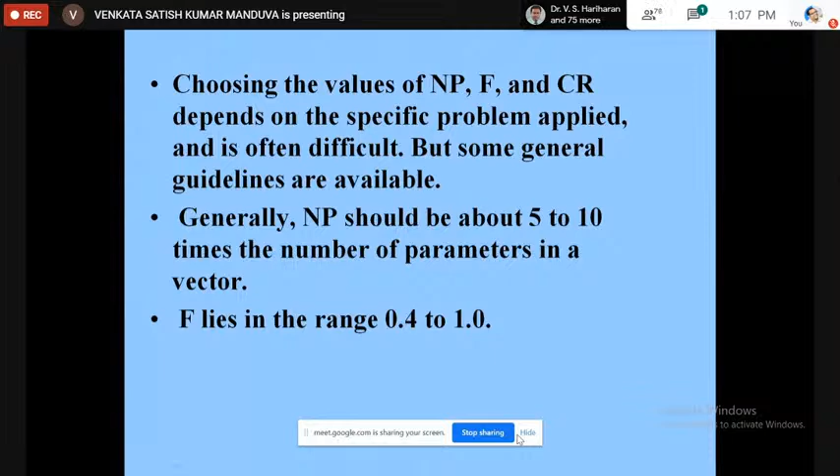So here DE stands for differential evolution - this is one type of strategy. 'Best' means the best vector in the population is chosen first. Then only the difference of one set of vectors is chosen, with exponential crossover. If you take two sets, there are four vectors instead of two. Similarly, 'random to best' may be used - here the best in the population is taken along with a randomly chosen vector, where R stands for random. So these are all important things in differential evolution: population size, scaling factor, and CR value are all important.

Coming to swarm intelligence - the next part of my presentation. I already told you evolutionary algorithms imitate nature. Very similar to that, these algorithms are also developed, but they imitate the swarm - rather than human beings, they imitate animals and other things.

A single neuron in the human brain can respond only to what the neurons connected to it are doing. But if all the neurons are connected, it can become a brilliant brain like Albert Einstein. Similarly, an individual ant is not very bright, but ants in a colony, as a group, can do remarkable things. This is how swarm intelligence algorithms got inspired from nature.

So it is again learning from nature only. We know in day-to-day life birds are flocking, ants are moving, but the question is how we can use their intelligence for optimization. Out of these, particle swarm optimization and ant colony optimization, we are concentrating here, even though there are many others.

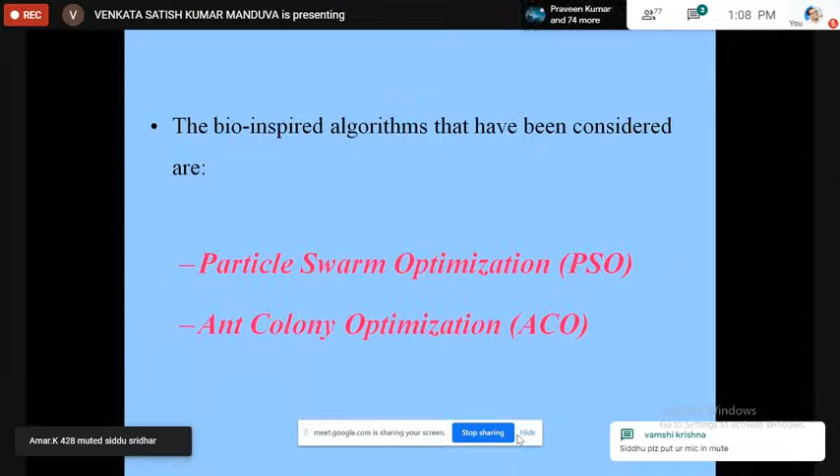Coming to particle swarm optimization - here a particle is nothing but a solution. This is based on how birds fly. Birds when flying have two things: one is their own experience, and the other is social experience - that is, neighboring birds will also share information. Based on this only, this algorithm was developed. Birds flocking is one of the best examples.

When a bird is in search of food, it determines its velocity not only based on its personal experience but also through information gained through interaction with other members of the flock. So their own experience is one part and others' experience is another part. People incorporated this into the algorithm - that is how PSO was developed.

PSO algorithm is not only a tool for optimization, but also a tool for representing socio-cognition of human and artificial agents based on principles of social psychology. A PSO system combines local search methods with global search methods - we are balancing exploration and exploitation.

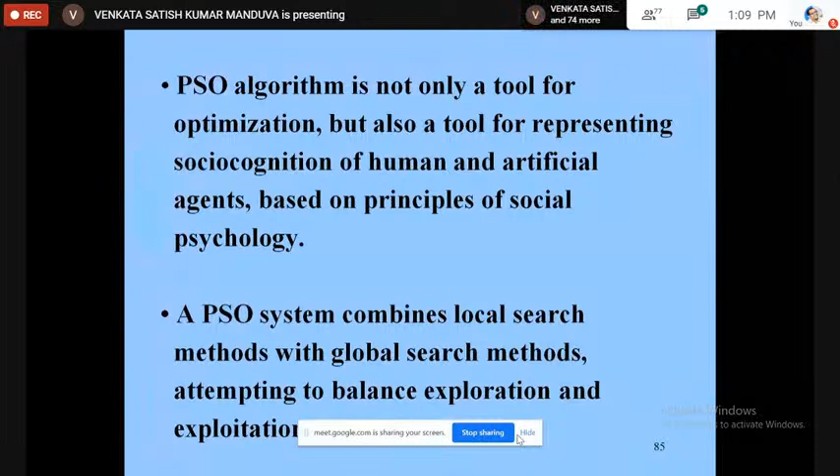What properties do we expect from particles? A particle can be thought of as a bird, or in our case, a particle is a solution. We expect the ability to exchange information with its neighbors, the ability to memorize a previous position, and also the ability to use that information to make decisions.

So there are three things. They are getting information, they are exchanging information from neighbors, they are memorizing where from they have started, now where they landing. So which is the best? They can decide. Ability to use information to make a decision.

These properties we are expecting for a particle to use in PSO. So in particle swarm optimization, each particle is a potential solution to the available solutions, and this group we are calling a swarm, a particle swarm. So every particle has position and also velocity. The position vector of a particle with respect to the origin of search space represents a trial solution.

The basic steps involved in PSO are: first, we will initialize a population of particles with position and velocity. Every particle will have position and velocity on d dimensions of the problem.

Next step is we will update the velocity. Each particle's velocity we will update, for which we will use the formula shown in the figure. Here, this is velocity at the next instance. If v of t is at instance t, this indicates the next instance, the velocity of a particular particle at the next instance. This is the formula given by the people who developed it.

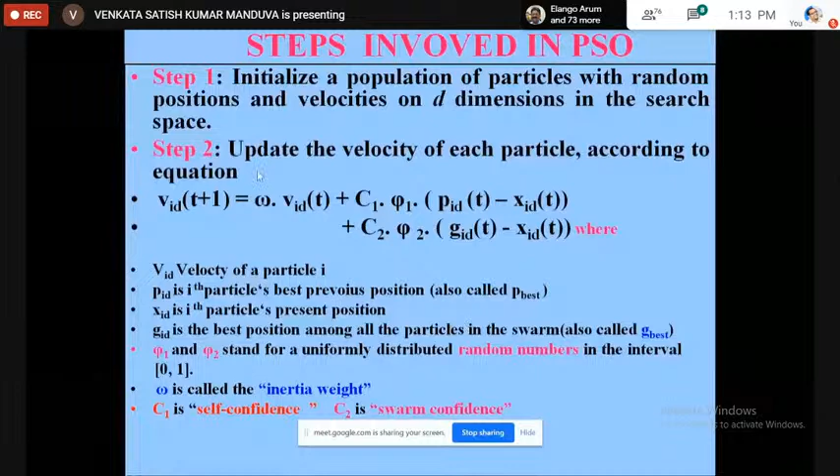So this algorithm will use all these parameters in calculating the velocity in the next instance. Once velocity is known, we can find out the position in the next instance.

The acceleration constants C1 and C2 are very important here, and adjustment of these particle constants is also very important, and normally it will vary between 0.1 to 1. Large inertia weight is also important - if you have large inertia weight, it will lead to searching new areas. If you reduce the value of omega, that is the inertia weight, it will fine tune the search.

That's why normally people suggest that at the beginning, with maximum number of iterations, as the current iteration progresses and the number of iterations increases, first we will go for more search - exploration will take place, then exploitation, then fine tuning exploration will take place.

So once velocity is known, then we can find out the position in the next state. This is position in the next instant, position in the previous instant - if velocity is added to that, then we can find out the position in the next instance.

Next, once this process is over, we map the position of each particle into a solution space and evaluate its fitness, as basically all these algorithms are based on fitness evaluation. So we got a swarm of first generation, a swarm of second generation, and we are evaluating the fitness. Then we loop until the process is repeated the required number of times.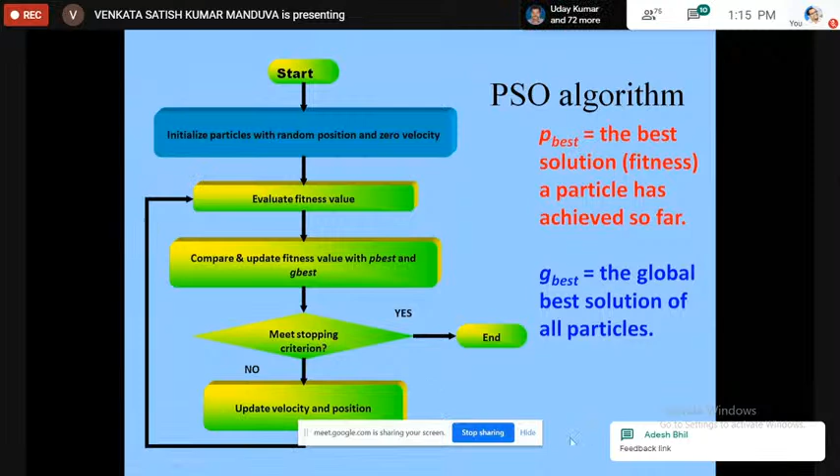If 100 generations are over, that means we are close, and whatever best solution we got among them, we will say it is the best solution. Unless it is satisfied, we will repeat: again update the velocity and position. If the stopping criterion is not met, just repeat the procedure.

Of course, it has advantages and disadvantages. Easy to perform, few parameters to adjust, and efficient in global search are advantages. Whereas slow convergence in the refined search stage and weak local search ability are the disadvantages.

Particle swarm optimization can also be hybridized with other algorithms. For example, people have hybridized it with genetic algorithms, because mutation, which is available in genetic algorithms, can be combined here in PSO. That is how we get a hybrid algorithm, a combination of genetic algorithms and PSO. Similarly, there are a variety of applications of PSO in all areas, not just mechanical, even other areas we can apply it.

Coming to the last part of my presentation, the last algorithm: ant colony optimization. Let us see the screen.

Ants in day to day life, we might not have observed keenly, but they move from the nest to the place where their food is. When they are moving, they are optimizing the problem, choosing the shortest path. They are using their intelligence to search for the shortest path. Even though a number of ways, in a zigzag way, the ants can move from the nest to the food, after some time you can see all ants moving in a particular path only, the shortest path. How is it possible? Let us see.

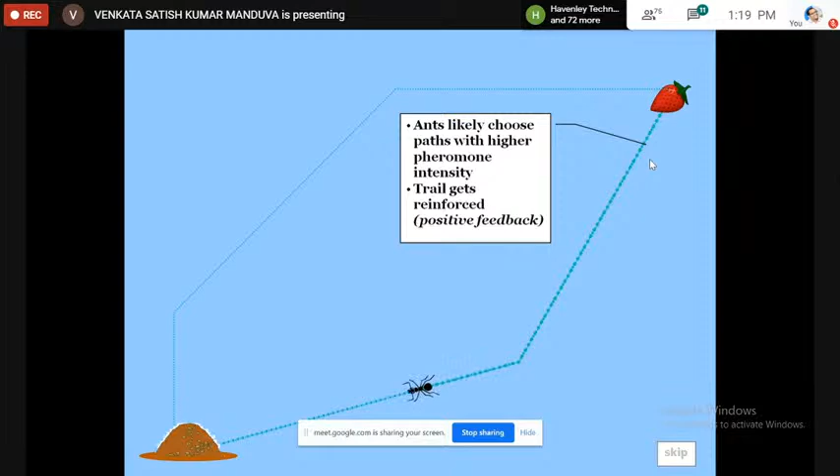Then the ant repeats, and naturally this path is left over. Another characteristic of pheromone is that as time passes, it evaporates, remaining only for some time. If no ant follows a path, it automatically evaporates. So the second path, with ants still moving on it, gets strengthened, whereas the first path, with no ants moving, gets evaporated. After some time, this becomes the best path.

But a third ant randomly chooses yet another path. Now you can imagine this will automatically become the shortest path. After some time, pheromone on this path becomes stronger and stronger, while the other path evaporates, and all ants start moving from nest to food only following this path, which is the shortest path and on which more and more pheromone accumulates.

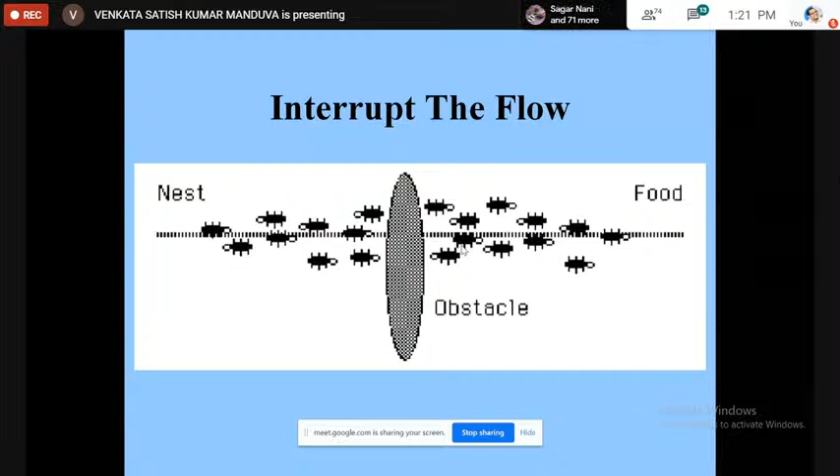Similarly, when they are moving around an obstacle, they will follow the same rule, because an obstacle is there on their way. If they move this way, it is the shortest path; if they move this way, it is the longest path. The same principle applies here, that is the same pheromone. So automatically, after some time, you can see all the ants following the shortest path. They are simply following the pheromone strength, and automatically following the shortest path. This is the nature from which people got inspired and started implementing this in algorithms for finding optimum solutions.

So natural ants choose the shortest path, as I discussed. In route selection, ants are forced to decide whether they should go left or right, and the choice made is a random decision. The first ant is chosen randomly, the second ant also chosen randomly, but ultimately the third ant, which has chosen the shortest path, also randomly chose its path. But pheromone accumulation is faster on the shorter path, and the difference in pheromone content between the two paths over time makes the ants choose the shorter path.

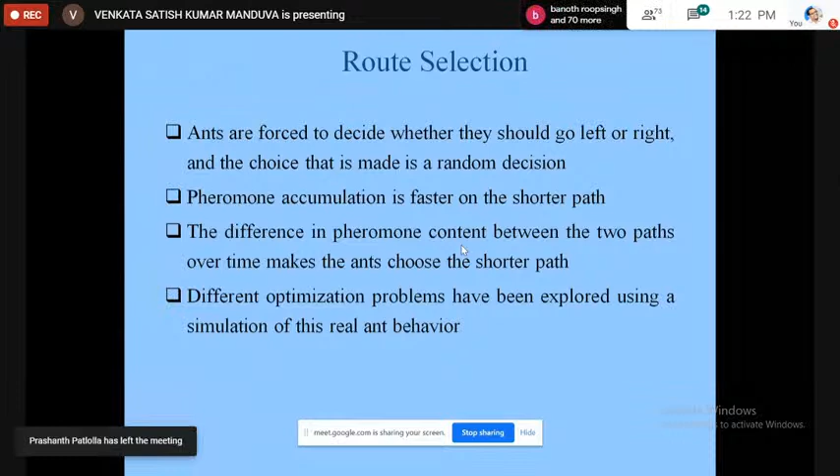And different optimization problems have been explored using a simulation of this real ant behavior. So, of course, this is the same idea.

Let us see. This is the real ant, but of course real ants don't have memory allocation. They don't know how to evaluate the quality of a solution, and they don't have knowledge of distance estimation. But we will incorporate, just like we incorporated in particle swarm memory and memorizing the p-best and g-best, similar characteristics into the natural ant. Then we get an artificial ant. With these natural ant pheromone concepts, plus memory allocation, quality of solution, and distance, we will find the artificial ant. This can be used for many problems, like the traveling salesman problem, a well-known problem, and of course NP-hard.

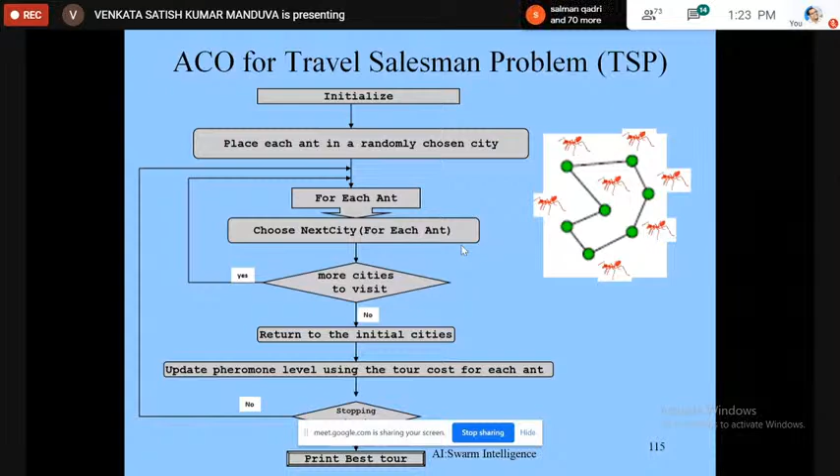You place each ant randomly in a chosen city. Once they are moving, we use the same concept as pheromone here. So for any ant k, the probability of moving from state i to state j depends on the combination of two values: one is attractiveness and the other is trail level. Attractiveness, as in the previous formula, indicates the desirability of that move, whereas trail level indicates how proficient it has been in the past.

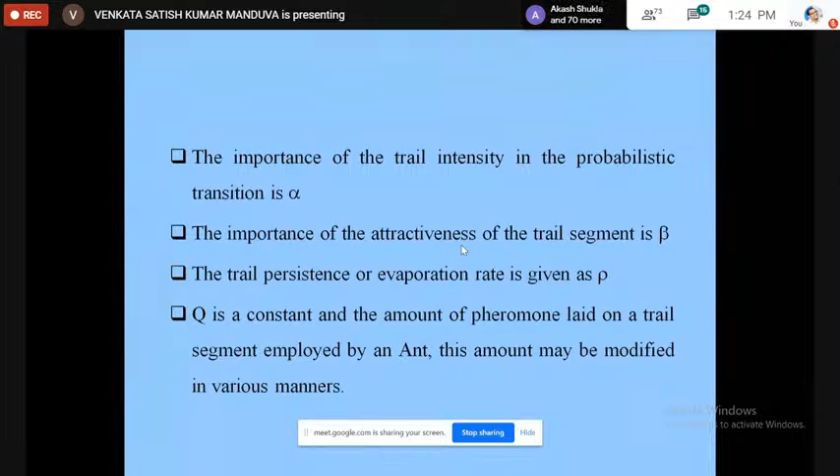So this is another example in our engineering problems. We can say, if you want to use a robotic arm to drill a number of holes, just like the traveling salesman problem, where a number of holes are to be drilled, where to start and come back to the original state, and what is the best way to do it. This is also an application of TSP, only for manufacturing, we can say.

So these are a few different algorithms. I have given some idea about different algorithms like genetic algorithms, particle swarm, differential evolution, particle optimization, and ant colony optimization. My only intention in this lecture is that youngsters can learn more and more about these algorithms and use them for their optimization problems, in whatever area they are. That is my only intention, nothing else.

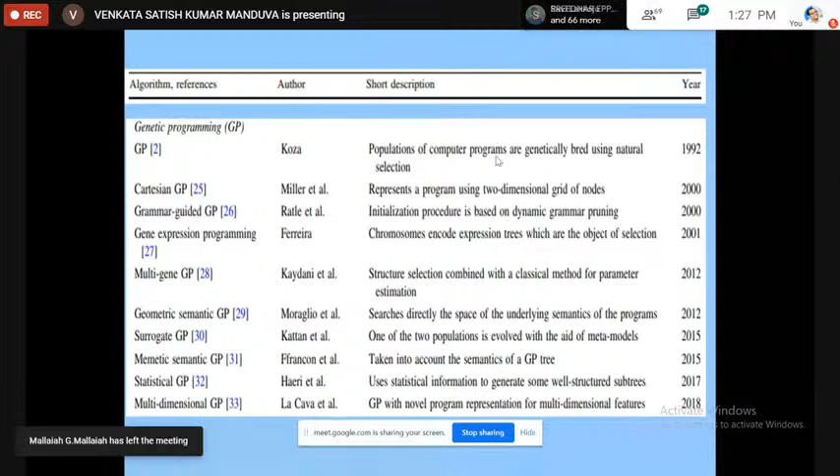Maybe some more may be missing, whatever I could get from literature have been shown here. Similarly, genetic programming also, since 1992 onwards to 2018, different people have contributed and changed the basic approach with a few modifications. So this is how they have developed it.

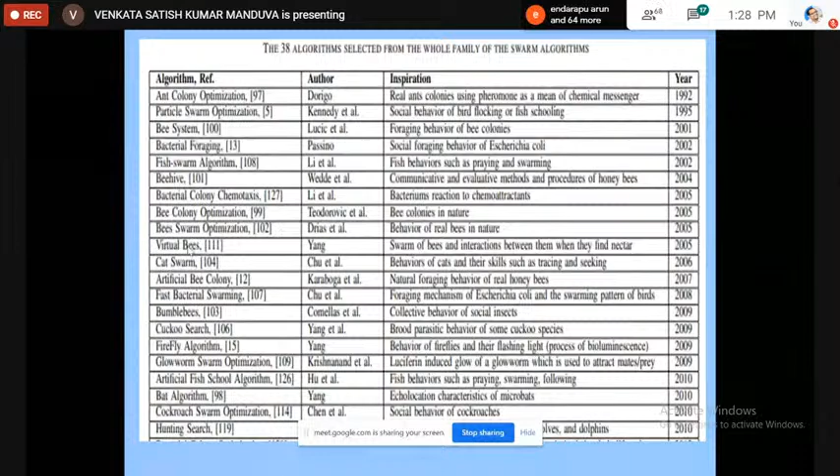Coming to swarm intelligence, similarly I have given a picture about only a few, like particle swarm and ant colony. Just for the benefit of participants, you can pursue many of these algorithms. Ant colony and particle swarm are two which I have covered, but bee system, bacterial foraging, beehive, bacterial colony, bee colony, virtual bees, cat swarm are all there. So firefly algorithm, bat algorithm, like that, there are so many.

So even this list continues. Wolf search is there, social spider optimization is there, artificial wolf, crow search, dynamic virtual bats algorithm are there. Of course, just to give awareness, I too don't have much idea about all these algorithms, but if you want to use these algorithms for your optimization problems, I just want to tell you these are the possibilities.